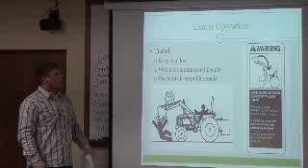Animals and people, and use your hazards when you're on a public road, especially if you're carrying something. So whether that falls out of the bucket or say the net wrap breaks on a bale and half of it falls out, I mean, these are things that can not only harm you, but if a car hits a half a round bale, you can imagine what would happen.

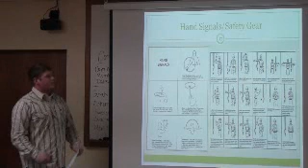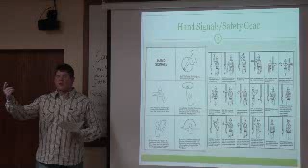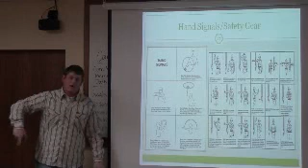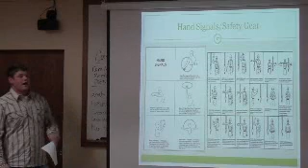And here's some hand signals, and I guess the safety gear got taken off, but these are all things that someone should know. Just having general signals, because you obviously can't communicate verbally through a cab, especially when you're operating. So you need hand signals that are specific to not only the loader, but the actual operation, whether you want to go up, down, tip your bucket. So I'm not going to go through all those, but just to know that those are there and they're in the loader manual. So if you aren't familiar and you're working with someone else, it's good to have some hand signals pre-set.

All right, now I'm going to talk about the 4020. We're going to kind of change gears and go towards more safety features as opposed to maintenance. The main thing is your signs and your warnings on the 4020. Of course, I don't know how many years old that 4020 is, but it's quite a few. So certainly it's not going to have all these danger and warning symbols on it. I know most all of you have run a lot of equipment, and you know what's safe and what's not.

But with a class like this, where you got a lot of people coming through with diverse backgrounds, maybe someone runs Case equipment, maybe somebody runs new equipment. I mean, there's a good chance somebody's in here that hasn't run the 4020. So there's the different features on there that you just need to be aware of. It wouldn't hurt to keep up the stickers, the maintenance, the signs on there that tell where the dangers are.

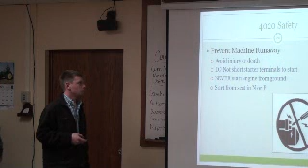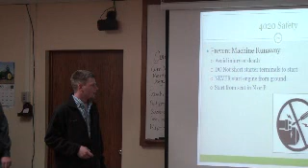To prevent machinery runaway, don't start on the ground. I know everybody does it. You're loading corn, you get hooked up to the auger, just reach over, start the tractor. Everybody does that, but if a little kid was on there playing around and you put it in first gear, bad things could happen. So don't start it from the ground. I realize a lot of people do that, but if you do, make for dang sure it's in park.

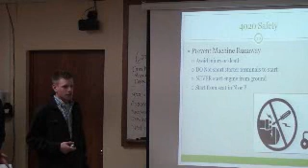Another thing, if you're having tractor problems, your starter doesn't work, you get the screwdriver out, you try and start with the solenoid. A lot of people do that. Once again, you're starting it from the ground. The tractor jumps, you're standing right in front of that big tire. So if the tractor starts and it jumps, it's basically just going to run you over. So just make sure that it's in park, or if you're on it and you got the clutch pushed in, make sure it's in neutral to say the least.

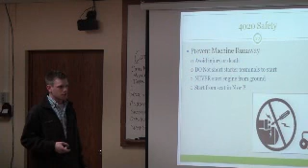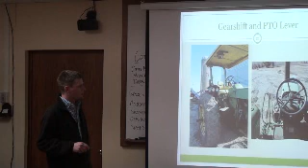The gear shift, the PTO lever, for some of you that haven't run an older tractor like the 4020, this is your PTO lever. You want to obviously make sure that's shut off before you start it, especially if it's hooked up to an implement where somebody could get hurt. The gear shift is on the right side. Park is all the way forward and into the left front corner there.

And once again, when we talk about no fender riding, you're riding with your dad to go get another wagon, you jump on the fender. It's really pretty unsafe, especially with these small fenders. The tire's right there to catch your leg and throw you right off of it.

To talk about the rollover protection system a little bit, you're always supposed to wear a seatbelt, especially in the newer equipment. But on the older equipment too, like this 4020, it does have a rollover protection system. And there is a seatbelt on it, and that's something that you should be using all the time. You need to inspect your seatbelt hardware at least once a year, probably more often. But if you're going to be using it all the time, you're obviously going to know whether or not there is something wrong with it.

And one thing to point out is if an open station tractor like that does not have a rollover protection system on it, you do not wear a seatbelt with it. You don't want to be strapped to that tractor and have it roll over and be pinned underneath of it without any protection system.

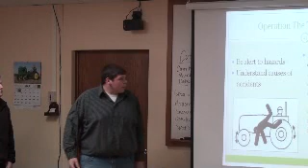And then just some operations that, of course, these again all come right out of the manual, which we do have a manual for every tractor here, or we should. I know the 4020 has one ordered. But some of the things that you just want to look at is you want to be alert to all hazards. And again, a lot of you guys have good farm backgrounds and know what these are, but you just need to be aware. That's the big thing. Be aware about everything that's out there.

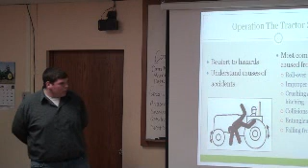And you need to understand what causes accidents when you're running this type of machinery and when you're hooked to implements. Some of the main accidents are from rollover, improper starting, like you talked about, starting with jumping the starter, or starting from the ground, crushing and pinching points. And that comes back to what Abe said with the loader. You just got to watch where you're at. You don't want to be underneath of it. You don't want to get your hands in places that could pinch.

Another big thing that we really haven't touched on much yet is collisions with other vehicles. If you're driving that tractor down the road, especially an older 4020 like that doesn't go very fast, and some of the newer tractors go quite a bit faster, but you want to make sure it can easily be seen from anywhere on the road by other vehicles, because if you're going 18 miles an hour and some car is flying up at 60 miles an hour, that's not going to look pretty if you get in a collision.

And then entanglements in the PTO, that's huge too. I mean, we've all heard horror stories about somebody stepping over a PTO and getting their pants caught or catching an arm on it or something. And I don't think anybody out here wants to live with that. And then falling from the tractor, riding on the fenders, you never know. You could be riding across the field or go through a waterway and one little bump and you're off and you're run over and that's the end of you.

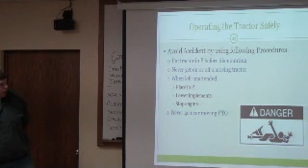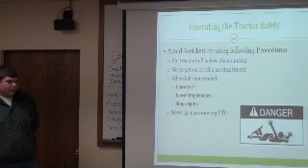And then again, before we dismount the tractor, we want to have it put in park before you shut it off and dismount it. You never want to get on or off a moving tractor. That kind of goes hand in hand with starting from the ground. I mean, the tractor's moving, it's not going to be a real great idea to get on or off it. One little slip, if it was icy out in the wintertime, you go down and that's it.

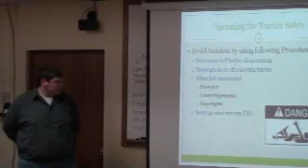When you're leaving this machinery unattended, you want to place it in park, lower all implements to the ground, stop the engine, and then it's safe to dismount. And of course, if you have any little kids around, it's not a bad idea to take the keys out of these things. Or if you're leaving it on a farm that's not at home or somewhere that's not a secure area, it's not a bad idea to take the key with you because you never know who could be coming around.

Getting on that machinery, taking it for a joyride, you never know what's going to happen, because then you don't want to be liable if some kids come out and they're stealing your tractor, joyriding through waterways and tip it over and kill themselves, and boy, that wouldn't be good. And then you never want to go near a moving PTO, obviously, too. We'll just kind of touch on that, and we'll point that out a little more when we get outside.

Can anybody tell me what's missing in one of these pictures? An operator? Flash from the right side. Think more basically. Seatbelt. Seatbelt's and SMV sign. Yeah, that's one major flaw that we found so far with the 4020, obviously there's no SMV sign. I know it probably doesn't do a lot of time going down the road, but it's still law. You need to have an SMV sign on the tractor, especially in this area with all the traffic, and particularly at night. There's nothing reflective on it.

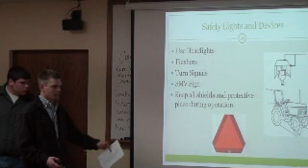Like you kind of touched on already, the safety lights and devices. The 4020 has one flasher on it. I think probably two would be better, especially at the top of the back of the ROPS, the canopy there, a little higher where you can see it if you're going to be doing a lot of traveling down the road. Turn signals, they're very important. When you come up behind a tractor, how are you going to know if it's going to turn if you don't have turn signals? Somebody tries to pass you and you try and turn in. Good spot for an accident.

Keep shields and protective shields in place all the time. I know on the 4020 it's missing some shields over the PTO and the manure spreader. We'll look at that when we go out there. A lot of people, they're a pain to work around. A lot of people just pull them off, and that's usually when accidents happen.

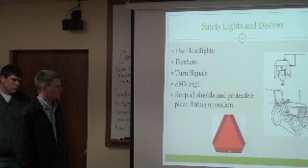Like I talked about, I think our 4020 could have lights up here. I think that'd be a good spot for some lights where people can see it. And like I said, there's no orange sign back there. On the PTO, there's no shield right there. We'll look at that when we get outside. Then we hooked the manure spreader up to the 4020 to show you guys some things. This is clearly not a state-of-the-art manure spreader anymore. It's got some years on it. And this kind of ties back into